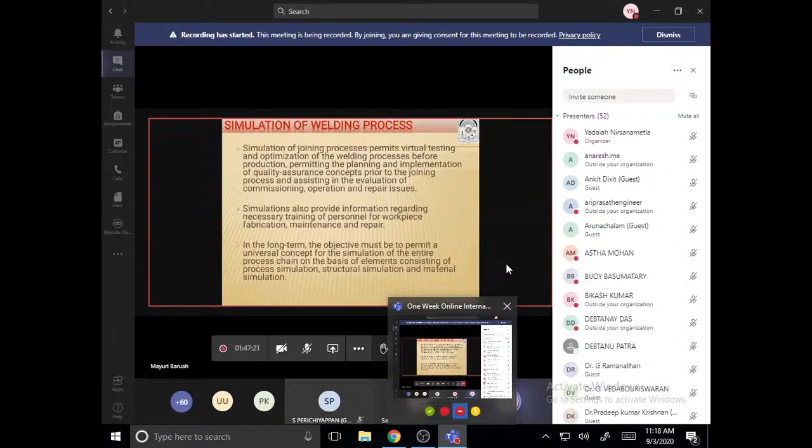Yes, that weld joint also needs to be tested. A good weld joint is only visible through your naked eye, but after that, several testings have to be done. If you need a good tensile test, good strength material, then you have to go to the tensile test. If you need a good hardness material, then you have to go to the hardness testing. So all these things are taken physically, and it consumes a lot of time as well as resources.

So nowadays, the whole procedure is made virtual. That is, through some simulation software or through some coding, it is done where not only the welding process, but all the physical phenomena already mentioned - the heat source, heating and surface, melting, and the expansion and contraction - everything is assumed there.

Depending on that, what type of zone you form, what might be the dimension, and the testing also can be done. That tensile testing can be done in a virtual mode on the same specimen, and that saves a lot of time and especially resources.

Because if you are using low cost material, it is nothing. But if you are using some super alloys or some very costly material like titanium, there's a lot of risk we cannot afford - to lose so much resource, so much material. So the virtual mode is the main important aspect.

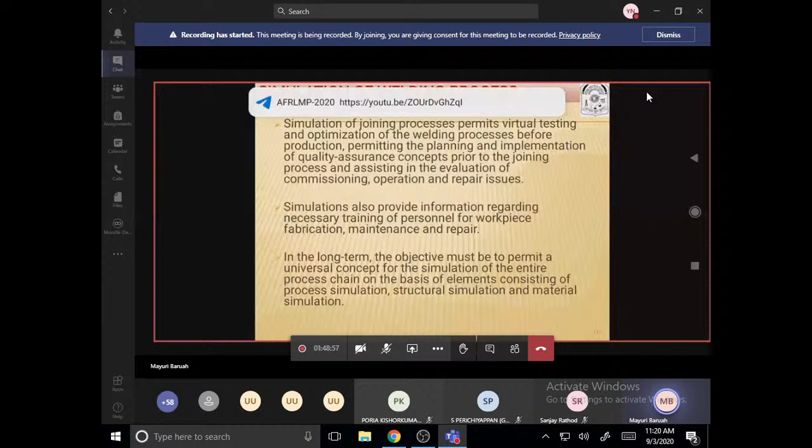So in the long term, the main objective is to permit a universal concept for simulation of the entire process chain based on elements consisting of process simulation, structural simulation, and material simulation. That is, we not only simulate the welding process, but we do the testing by giving all the thermal and mechanical properties, and you can define how fracture occurs.

Fracture is also done - fracture toughness and the theoretical J. All of these can be calculated, can be simulated through some software or through some coding, where material properties can thus be defined. So everything can be done with the project.

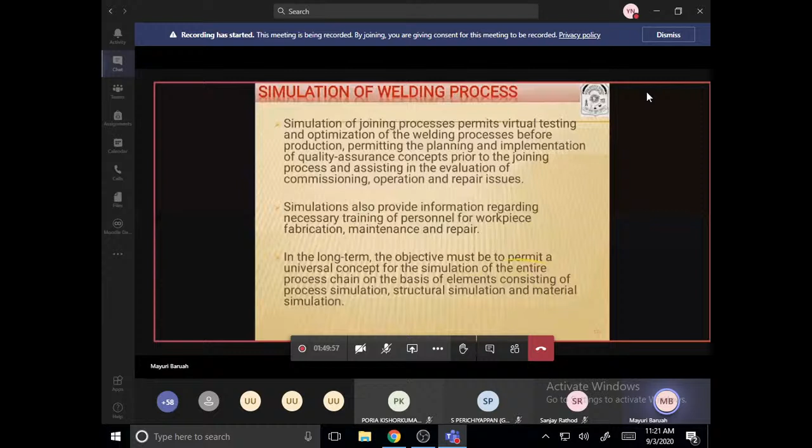So by that it tells you - supposedly some cracks are there. So after welding some circular cylindrical part, you are passing some fluid. The fluid is also exerting pressure on it, and if some cracks have already remained there, how long can you sustain it? How long can the cylindrical part sustain?

And then with pressure, you can give the values, boundary values are there - at one time, how much time it can sustain, so all this can be simulated. This is not just the component - simulation is a very important phenomenon.

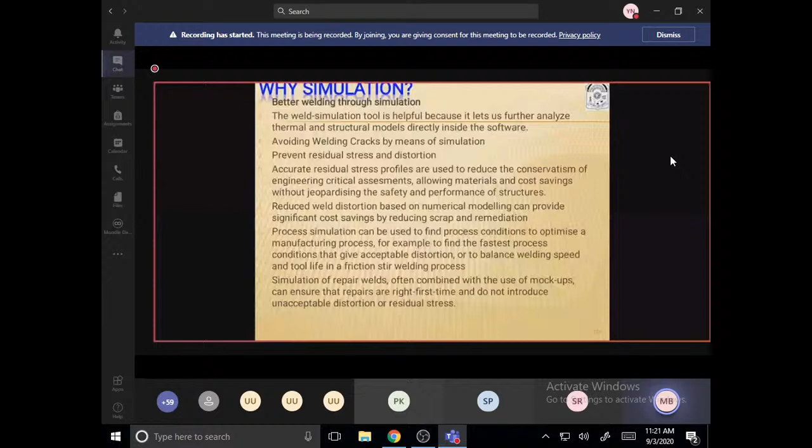Now, what are the methods that have been utilized for decades for joining, for solving the engineering problem? One is the analytical method, one is the numerical method, and one is the experimental method.

As I have already told, in the whole range you can do trial and errors. Yes, but that is very expensive, because for only a physical prototype, you first have to make 3 to 5 before making the main product.

For one single parameter you have to do the welding. It is better that if you have not got a good welding there, then you can perform the same experiment 2-3 times to ensure that this is a good weld. Only that can you apply to the main method.

But in the analytical method, what you do is use the second equation proposed for heat, for calculating the temperature - the Fourier heat law is the basic governing equation. So you try to solve it, and then you try to apply properties in numerical methods. And next is the numerical method.

That is already some mathematical representation will be there. You will be either approximating the circuit, the weld zone, or approximating the weld zone into small elements or small volumes, or finding the difference between two points in the weld line, and then solving something.

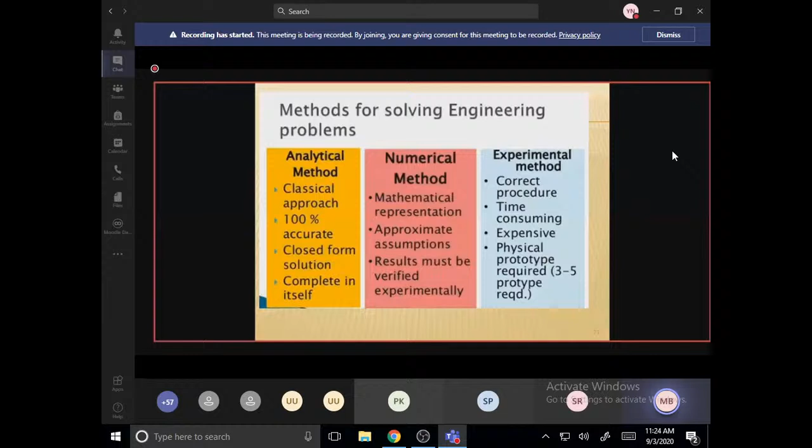So these are the various numerical methods that are available. One is the finite difference method, which is based on solving the differential equation. The difference between two points inside the weld volume is considered, and the difference in properties and physical properties between the two points will be calculated.

In the finite element method, what shape functions are there? Different functions can exist, different elements can exist, like brick elements, tetrahedral elements, hexahedral elements. So there are different elements. By this, you divide your volume into various elements. The more the number of elements, the more precise the solution can be.

If you are taking a brick element, your cube will be like a cube. So what's the difference? Then there will be 8 corners. You can find out the temperature at these 8 corners, and each element's 8 corners can have different degrees of freedom.

Understanding this is a little complex, but it is an easier approach. So all these things, the different nodes, what type of degrees of freedom and what type of functions will be there, that is the shape function. This is an important phenomenon in finite element modeling.

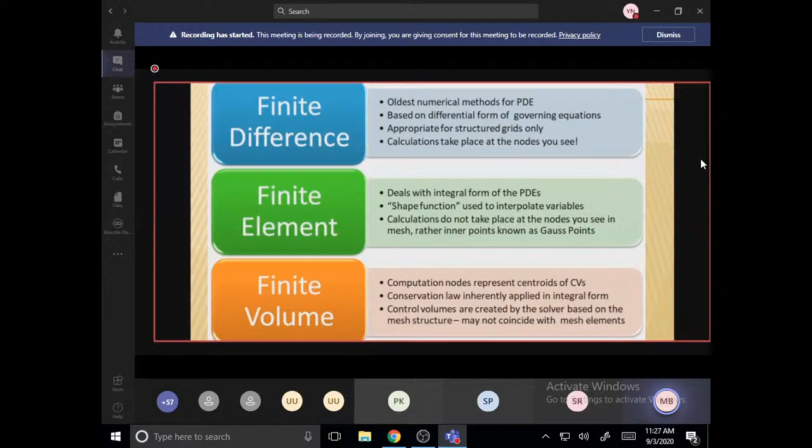Now let us come to how the finite element method works. I will be focusing on some results that I did using the finite element software, Abaqus. This is the same approach in every finite element software or coding. So what is the main basic part?

You first have to decide, the reason is the laser is focused to a small focus area. So what you need to decide is the heat source model. Now what do you understand by the heat source model? Like the laser is being focused to a small area, now what type of weld bead is formed?

After the simulation, it must be able to replicate the zone that you have found by experimental means. So the first and most important thing you need to decide is the heat source model. Then you do the thermal simulation by giving the boundary conditions, the first important thing being the initial condition. What is the initial environment?

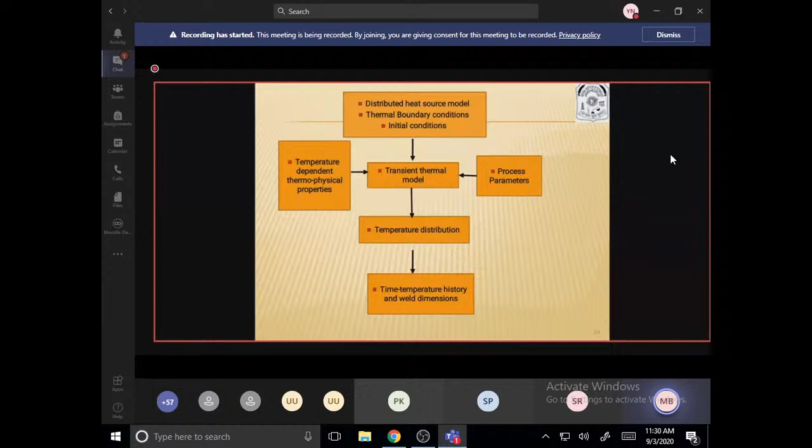Then, after simulation, you will be obtaining the time temperature profile. You will be obtaining the cooling rate, and the temperature development during the entire process.

So it is not visible here. So what are the various laser process parameters? Number one is the laser power. Number two is the energy density, the power per area.

Number three, if you are using pulse mode, what is the pulse rate? Meaning for how much time you will keep the laser on, and for how much time you will keep the laser in a very low mode so that it does not fall upon the surface.

So one will be the laser scanning speed, meaning if you are moving the laser from one end to the other, or moving the workpiece from one end to the other, so that the laser scans its entire weld area in a line. The laser scanning speed is an important phenomenon. So all these things define your laser process parameters.

You must first understand what process parameters must be used for joining. In microwelding, process parameters will have a smaller value, but you must understand the interactive effect of these process parameters. If you are using only laser power, the laser speed will also vary. At a certain laser speed, you have to vary the laser power. But if simultaneously the laser speed is also varied, then different effects will be there.

So the interactive effect of the laser power, laser velocity, and laser density is a must. Not only the individual effect, not only the laser power effect on the weld, but all these process parameters taken together must define your weld joint.

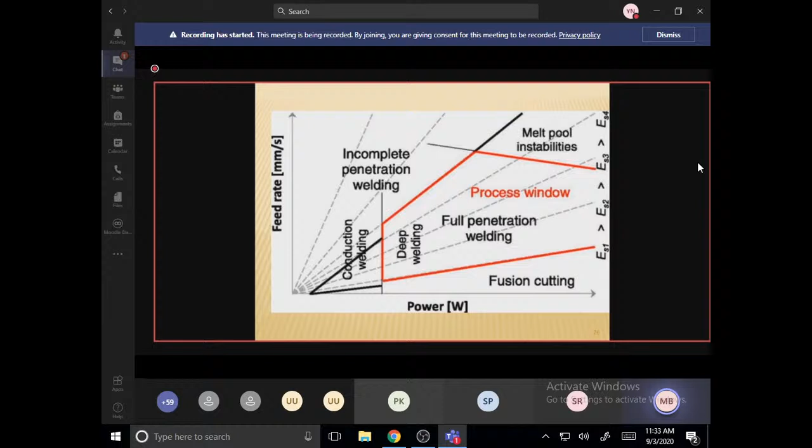And the joining is accomplished. So, what are the physical aspects now? Let us see, this is what conduction mode and keyhole mode are. I will just be defining it, not getting much into its physics.

So what is it? The laser has certain intensity. If its energy density, that is heat per unit area, is less than 10 to the power of 6 watt per centimeter square, then conduction mode can be accomplished. That is conduction mode, where the penetration is less but the weld width is large.

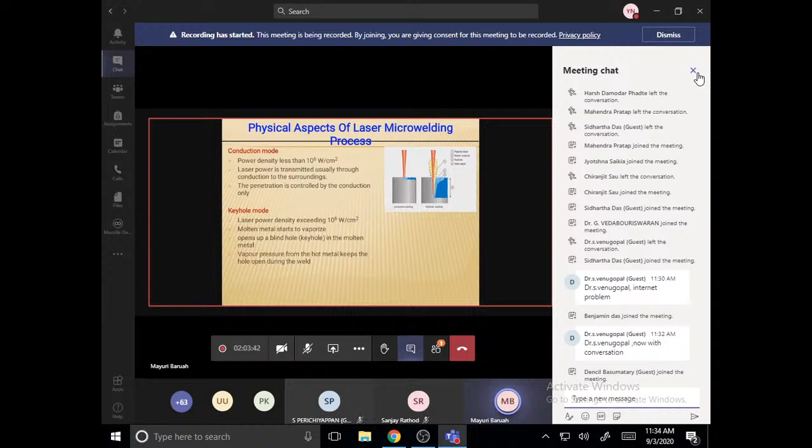Yes, that depends, because it is defined mainly by the buoyancy force and the surface tension force. A lot of fluid will be there, and how the fluid is moving during this welding process. In a molten state, how the metal is moving defines it directly.

Now next, the keyhole mode. In the keyhole mode, the laser power density will be greater than 10 to the power of 6 watt per centimeter square. Here the molten material will start evaporizing.

Because the energy density is very high, you focus on a very small area, and then the material's temperature reached will be much more than the melting temperature, and at that state it will start vaporizing. So when it starts vaporizing, the gas forms.

Then a keyhole type of thing forms, where the molten material will exert some vapor phase pressure in the downward direction and blow.

Like when you blow some liquid fluid, then what happens? Both types of things you observe. Similar is the case here. The vapor pressure will give some pressure on the molten liquid, and as such the penetration will be increased.

So this is just the basic routine.

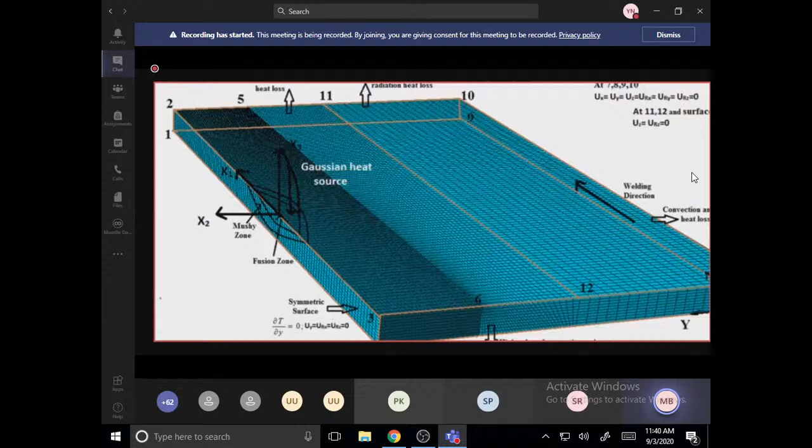But here we have shown only the surface heat flux. You must know that the laser is being focused on the surface with a Gaussian heat distribution. That is, the heat distribution from the tip of the heat source is gradually increasing towards the focusing surface.

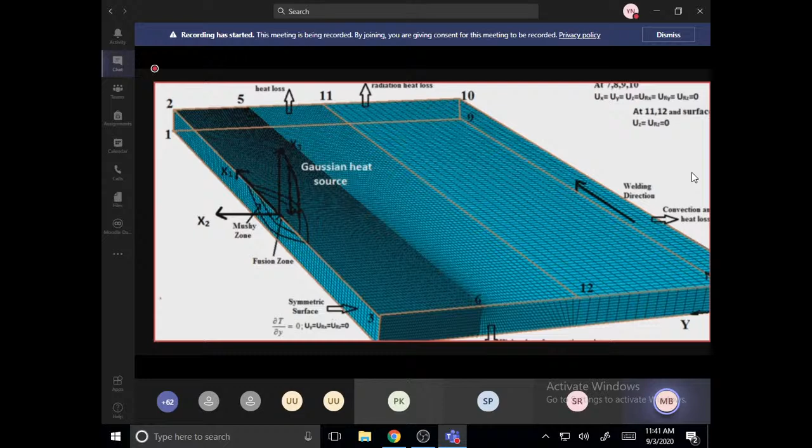And here you can find out, the mushy zone represents the value, so all these things need to be considered. If the Gaussian distribution is very steep, that is an inverted U type or inverted V type of thing, then the distribution term here will be different. If it is a little broader, that is the focusing area is more and it is not very steep, then it will gradually increase.

So this is what we call efficiency. Now the second term represents the efficiency. What do you mean by efficiency? The efficiency of a laser must be defined, and we know the efficiency of a laser heat source for welding is very low. I am not talking about the whole process, but the laser heat it has absorbed. Supposedly you have given 100 power, but it will only be able to use a small amount of this laser heat power.

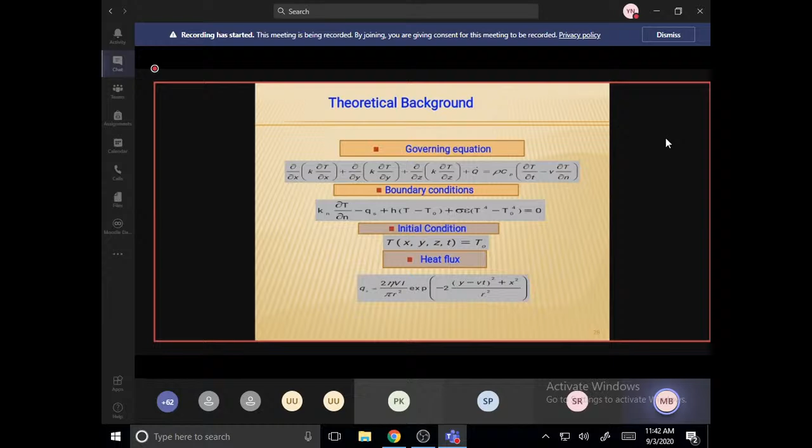Whatever you apply, the heat input received by the material for melting will be very low, generally in the range of 40%. Only 40% of the total heat supplied by the laser surface can be utilized for the actual heating and melting process. So defining the efficiency is also very important.

So here you can see the whole plate is divided into certain meshy zones, different mesh elements. The first part looks darker because the elements are very small in size, and so denser. Here the elements are smaller and more denser.

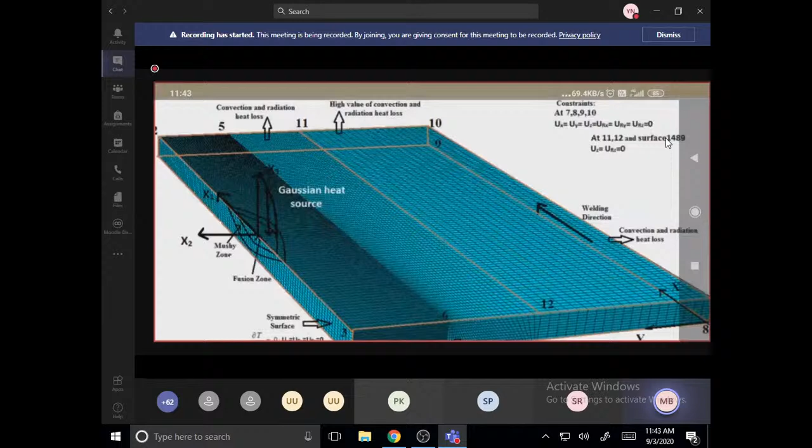This represents the area where the laser heat source is scanning, and as we move away from the laser heat source, the elements become bigger and bigger. The meshing here is done in a non-uniform way so that computational time can be reduced, because if you do heavy meshing throughout the plate, a lot of computational time will be needed.

So non-uniform meshing is followed here, and also you can see on which surface convection is taking place, which is open to the air. Open to the air means the heat is distributed to the air, and some surface will be connected to the fixture. Supposedly you are using a high thermal conductivity fixture like copper, then you have to define a different convection coefficient.

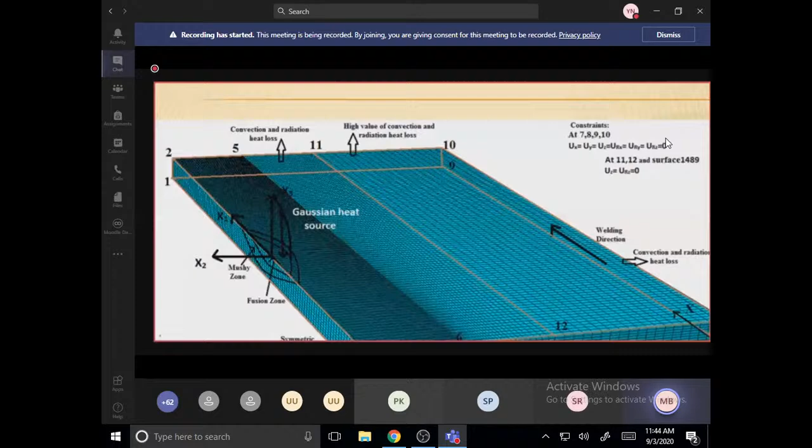If you are using only a mild steel fixture to hold the plate, then you have to use a different heat convection coefficient. In a similar way, radiation is also taking place, and from the top surface to the lower, the heat is conducted is a plus, and the heat loss by convection and radiation you have to subtract from the heat conduction.

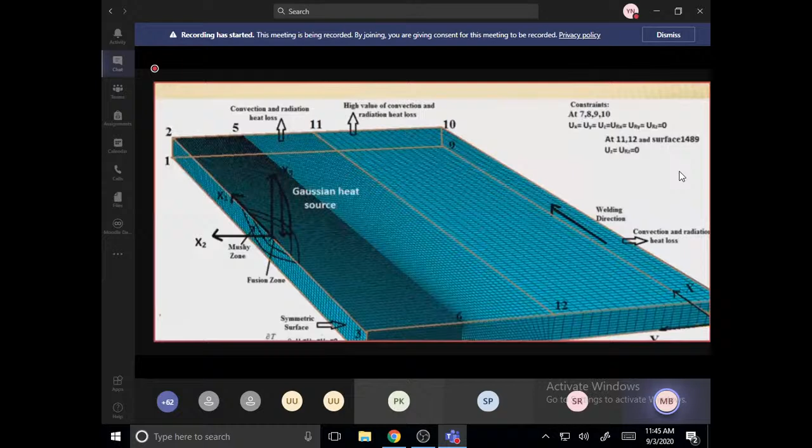So all these things, summed up together, define the weld zone, which needs to be defined very carefully while considering the weld zone. This is one of the situations which is shown here.

Here what we are doing is showing heat sources for three different materials, and how the material properties vary from one end to the other. Sorry, here it will not be ampere, it will be power, that was a mistake by me.

So what happens for titanium, which has very low thermal conductivity, is that it will focus the heat received to a smaller area. But with stainless steel, the top surface is stainless steel and the middle surface is mild steel. For mild steel, the thermal conductivity is large, much larger than titanium.

So what will it be doing? It will be conducting away the heat. So the area affected by the laser heat source will be larger, as is also revealed by the second diagram.

So this is how the simulation part occurs. Here the red zone defines the melting zone, that is more than the melting temperature. So if the melting temperature of steel is 1500 degrees Celsius, in the red zone it will be plus 1500 degrees Celsius. So here you must note down all the temperatures: the liquidus temperature, the solidus temperature, the microstructural difference temperature, recrystallization - all these zones in different colors represent different temperature distributions.

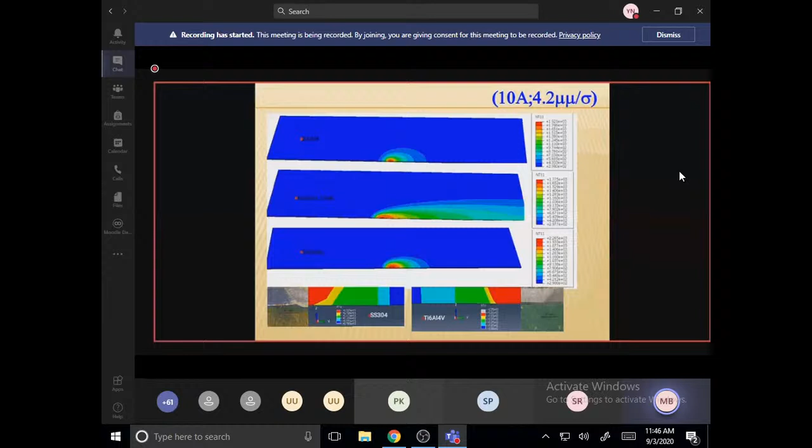So now from here, how will we find out? This is how this rate will be determined. In the third diagram, the graph shows that as you move, 0 represents the initial state, then as you move and the welding is completed, the time temperature for the welding is completed in 30 seconds.

And at the end you see that the peak temperature is the highest, because the heat from the torch is abruptly ended there. So you see that at this point the peak temperature abruptly rises. Otherwise, during the welding you can see the peak temperature is almost constant at 5, 10, 15, and 20 seconds.

Why? Because the welding process, though it is a transient process, has achieved equilibrium. At the start point and at the end point, the temperature is almost constant.

The heating rate and cooling rate are also almost constant for similar plate material. So this is how you can compute it.

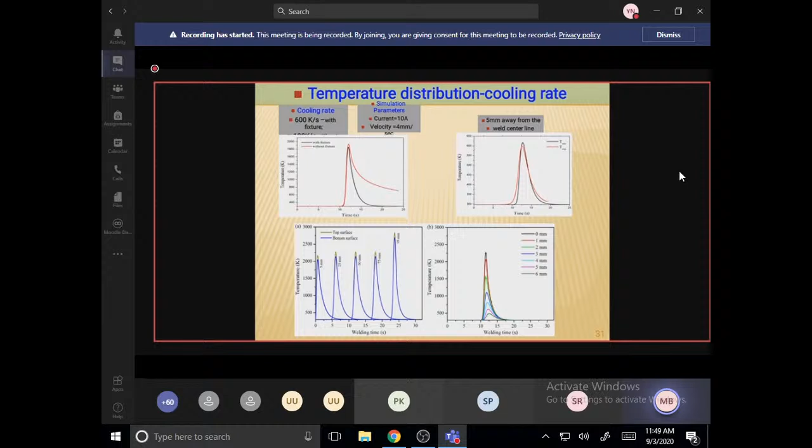Here I'm showing you have used pulse laser and how this radiation will be there. The blue color here represents what? They represent that this is not continuous welding - you are approximating it, though you are applying laser pulse, as a constant continuous curve.

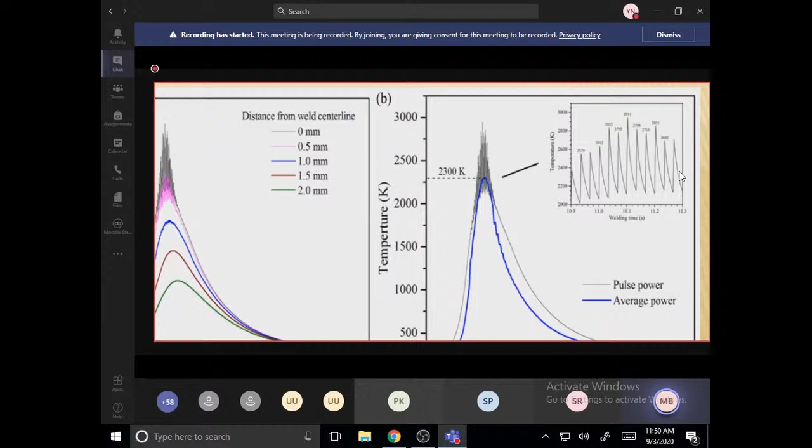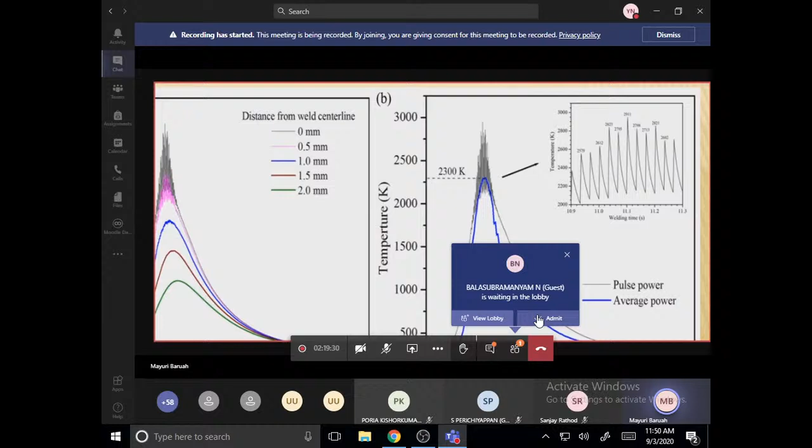Yeah. Your voice is clear, your voice is very clear. Yeah, you can speak. Okay.

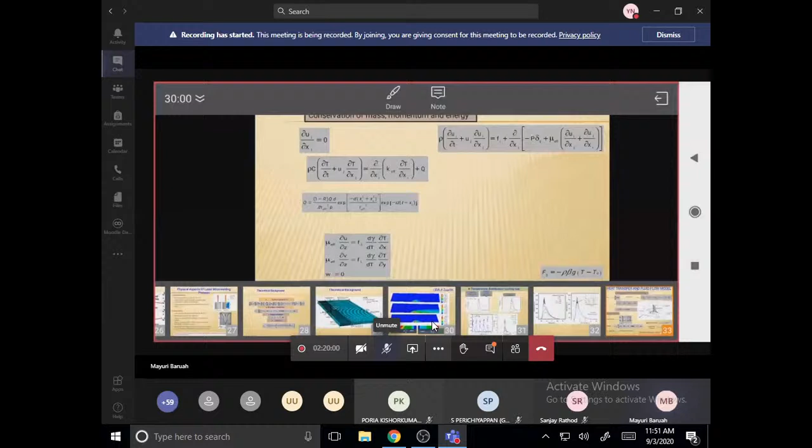So now next will be the heat transfer and fluid flow model. The earlier model was neglecting the fluid flow term, that is the various forces acting on it. As I already told, buoyancy force, surface tension force, viscous force - all these forces are neglected in the earlier conduction model.

Here this is a convection model, meaning you are taking into account the fluid flow. What will be its difference? In the earlier model, the governing equation is only the Fourier heat law. But here, what is the governing equation? It is the mass conservation equation, that is the mass flow rate is constant.

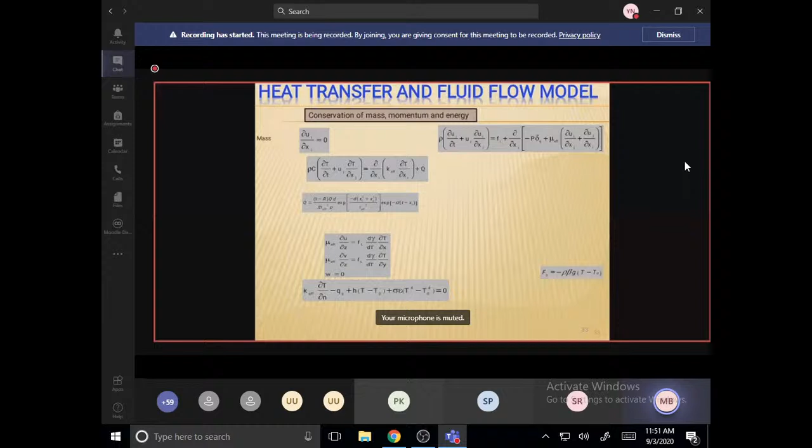So the second is the momentum equation, and third is the energy equation, that is the Fourier equation. So here, these are the various three equations that you must integrate and solve together. In the momentum equation, you take into account the various pressures and forces acting on it. And the energy equation takes into account again the temperature variation in the x, y, z directions and with time. So all these things you have to solve.

But here, three types of assumptions are done: that it is a Newtonian fluid, and it is a laminar fluid. So what do you mean by Newtonian fluid? That is the shear stress and shear strain that is happening, because one surface will be solid and one surface will be liquid.

So what about the boundary - when you are welding, only a small portion will be melted. The boundary of the base material will be in a solid state. So that is the boundary, and that boundary will be exerting some pressure. So all these things.

Stress and strain will be taking place, shear stress, because the liquid will not only be deforming longitudinally but some shear deformations can also occur. Shear will change its shape. So that shear stress by shear strain of the liquid will be linear - the more the stress, the higher will be the shear strain developed. This phenomenon is a bit difficult to understand, but it needs extensive solving.

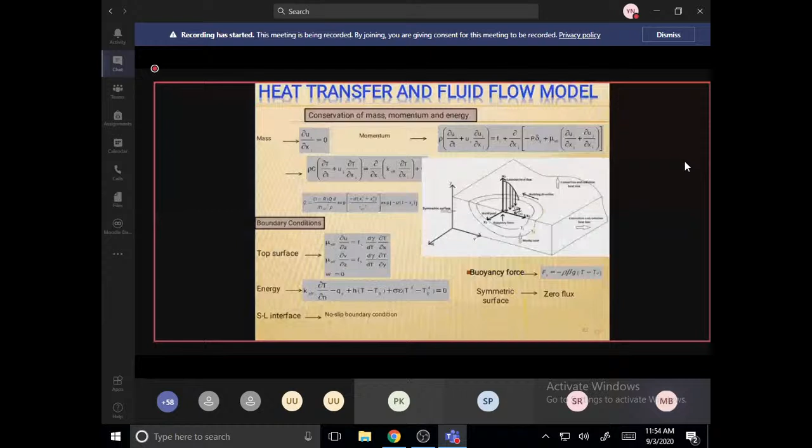What you must know while doing the weld pool analysis is the dimension coordinate, the nodal coordinate. Since we have divided the whole plate into small elements in finite element method, suppose a cube, that cube will have 8 corners, so each corner is called a node. You must know the coordinates of that node, that is, if the first node is 0,0,0, where the second node will be, and the shape function, there will be a certain way to solve it. So you must know the shape function value, that is the dependence of one node, interpolation of one node with respect to the other.

The process parameters are very important. Then what are the uncertain parameters? What do you mean by that? Certain parameters like efficiency, you cannot take arbitrarily, it depends on the beam size.

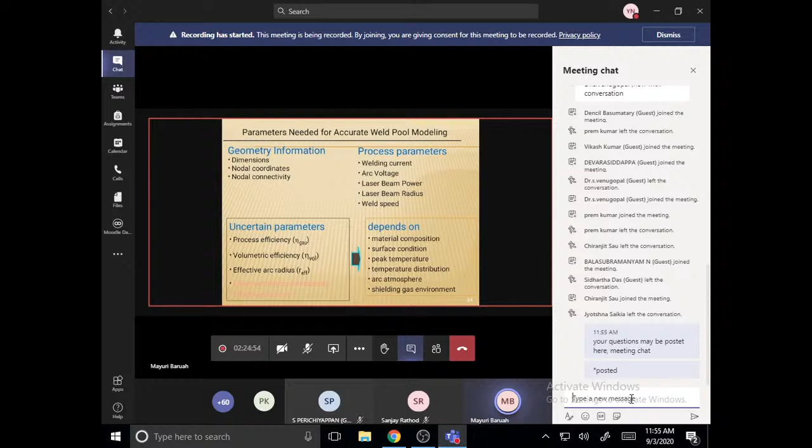And volumetric efficiency, that is the efficiency I was saying that laser efficiency is very low. But the effective thermal conductivity, now you know thermal conductivity of titanium is something, thermal conductivity of stainless steel is something, thermal conductivity of mild steel is much higher. But do you know in the molten state what will be the thermal conductivity? Because in the molten state it will be immediately molten, the temperature will be very high and then gradually decreasing, so you cannot define the thermal conductivity very accurately. You must give the temperature dependent thermal conductivity, but what is exactly the thermal conductivity is an uncertain parameter.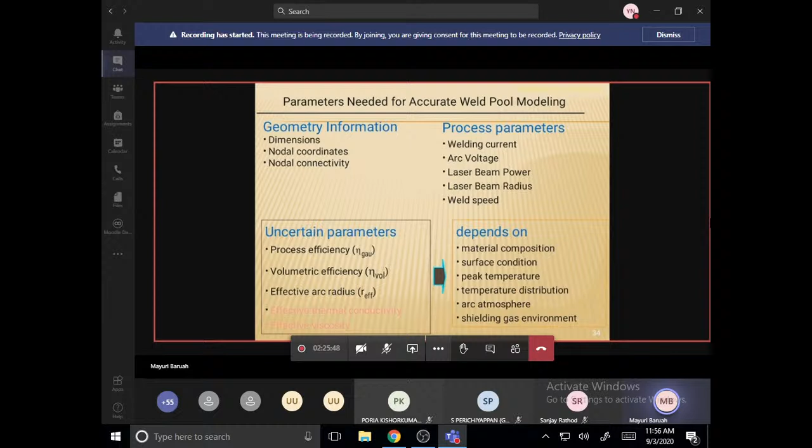So you need to do the optimization of the weld so as to find out the most effective thermal conductivity, the effective value of the viscosity, because for a liquid it is okay, but with temperature the viscosity also varies. So there is transient temperature in the weld zone, and the effective measurement of all these thermal properties is also important. For this you integrate your fluid flow model with some optimization tools. There are various optimization tools available, so all these things you need to consider.

For stainless steel it will cool down, for steel it will cool down suddenly. If the cooling rate is very high, martensitic structure will form; if the cooling rate is low, austenitic structure will form. Similarly for titanium, it was alpha, suppose you are using titanium-5, it was in the alpha-beta range, but as it is melted it completely transforms into the beta range, and as it cools, depending on the cooling rate, it will form alpha martensitic structure or alpha lamellar.

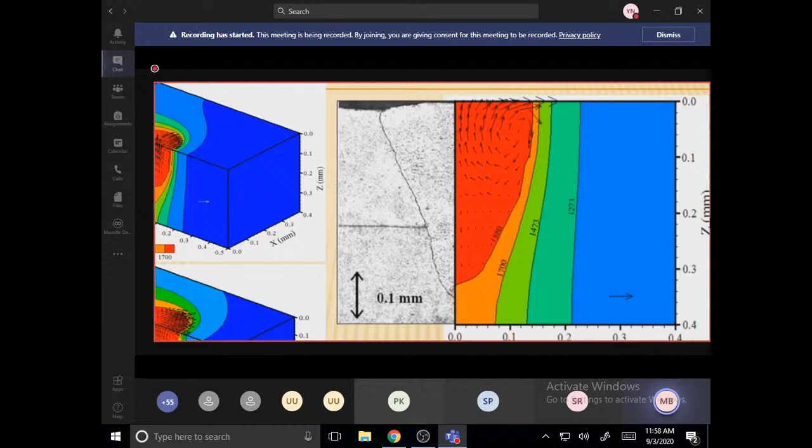So all these things depend on the various temperature field, and it also depends on the velocity. The arrow line here shows the velocity region, so it is moving away, it is moving in a clockwise direction, moving away from the center of the weld towards the outer surface. Equilibrium moving outwards means this welding is of the conduction type, not keyhole type, because the buoyancy force is acting upward and it is moving outward, and also the surface tension force exerted is different. So you must know not only the temperature field but the velocity, the movement of the liquid, the movement of the molten metal, is also important to take into account.

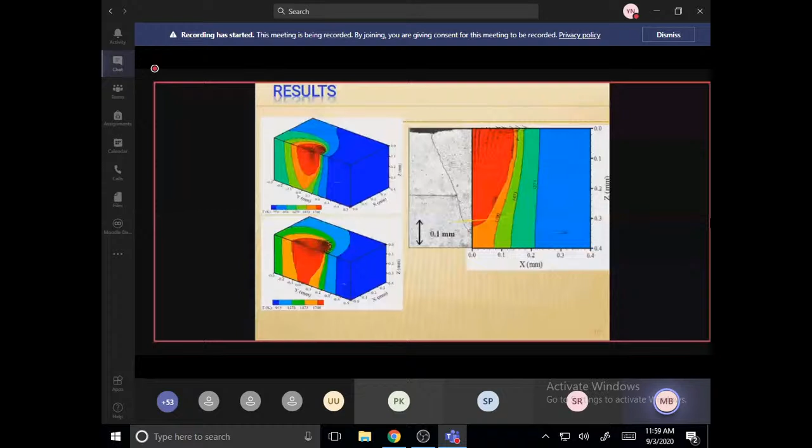This is an important thing, the effect of various parameters, how you define the various parameters. One is the Peclet number. What is the Peclet number? It is nothing but the ratio of heat convection to heat conduction, meaning how much the conduction mode compares with the convection mode. Depending on the value of the Peclet number, you can assume whether convection must be taken into account or conduction is sufficient to define the weld characteristics.

This is important: if the Peclet number is greater than 1, then convection is a must, convection is very important. The fluid flow analysis must be taken into account, and buoyancy must be taken into account.

Now, the one important thing I forgot to tell is that it is an incompressible flow, meaning the density is not varied, though temperature is varying. Then how is buoyancy included? The buoyancy is included in the fluid flow through the Boussinesq approximation. At the instantaneous point, the temperature might vary, and though the density is same, at the approximate instantaneous point the density may vary, and by that the buoyancy force is taken into account.

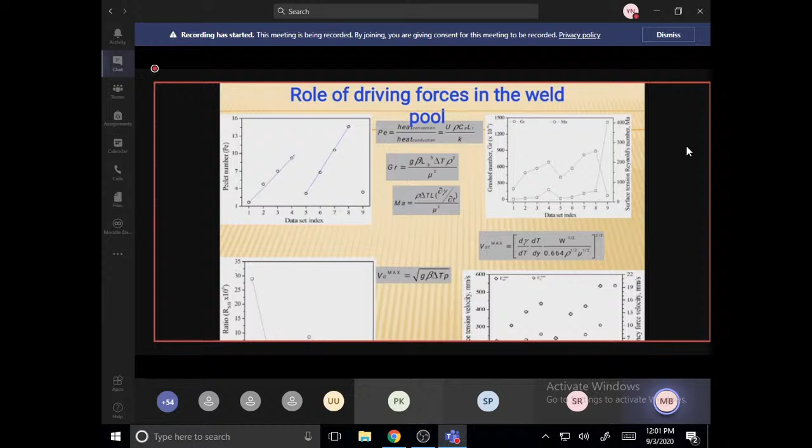Now, what is the Grashof number? It represents the ratio of the buoyancy force to the viscous force. So it's important to consider whether the buoyancy force or the viscous force is important. All these terms must be calculated with respect to the process parameters.

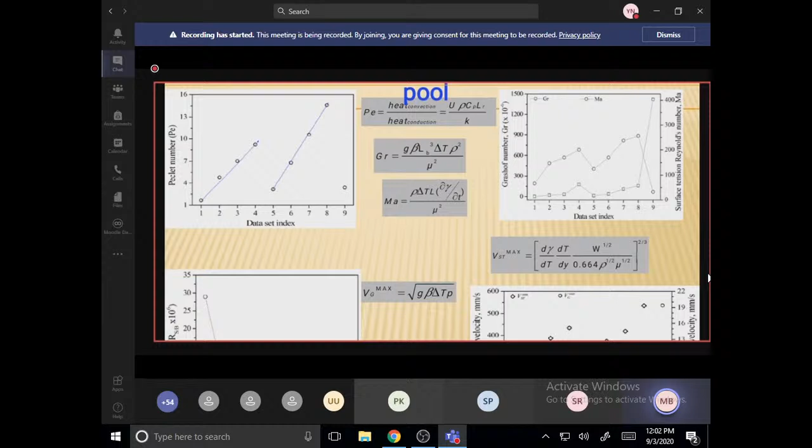So how are the process parameters defined here? In the Grashof number, G represents the gravitational acceleration, meaning what type of velocity field will be there, and by gravity how much acceleration will be generated. Then beta represents the thermal expansion coefficient, along with the temperature difference and the density. And L is the length of the weld through which this buoyancy force is operating. These are the various terms that need to be defined.

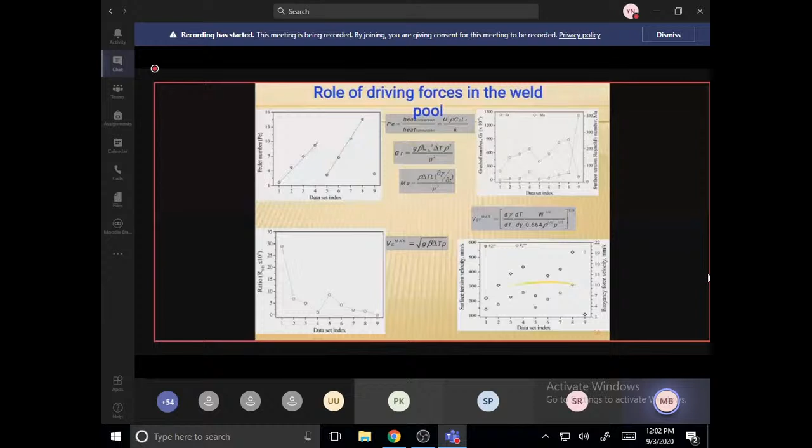Now let us understand, since I was telling that by plastic joining you are joining your plate, what is the important parameter that you must know? That's the last thing I will be telling you. Just five minutes more.

So it was the same for your heat conduction equation, but here, heat flux is assumed at the transparent top surface used for joining the polymeric material. The heat flux is assumed to be zero there. Then for all the heat flux equations you use, you assume it to be focused at the top surface of the lower material, and whatever heat is conducted accordingly.

Now here two parameters are important: the gap length, if there is any gap, and also the roughness factor. Because no matter how much you clamp the two pieces together, there will always be a certain gap between the mating surfaces. So this is how we take it into consideration.

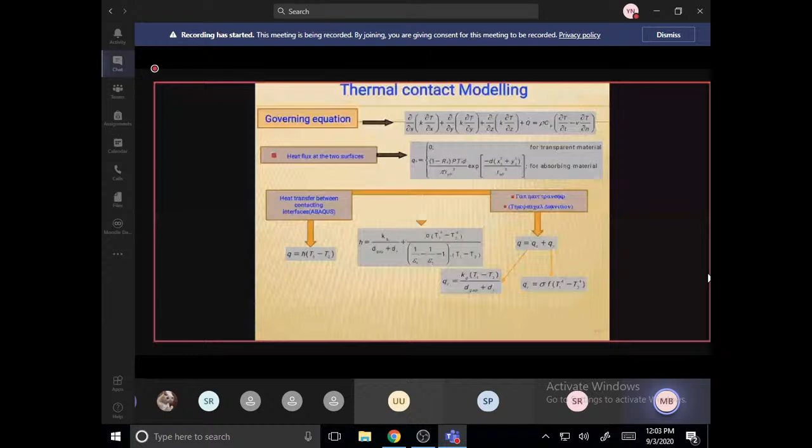Here, when you take the roughness into account, what is most important is the temperature of the pieces. The thing is it becomes more clear as you see the joining taking place at the interface. Now, what is the temperature at the interface?

And then gradually the temperature of the upper surface increases and that of the lower surface decreases, because it starts conducting the heat away towards the upper surface. So in this way, the air temperature in the middle gap is calculated, and then it is incorporated into the model equation.

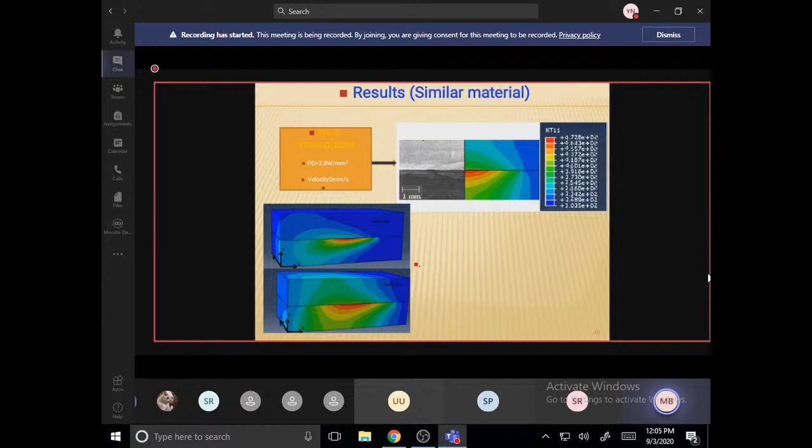Was convection occurring there, or how much radiation was occurring there? Some coding can incorporate this by taking into account the temperature developed at the two surfaces. So here it is seen that melting is occurring only at the lower surface and heat is conducting away. This is how it works, and this is a similar joint.

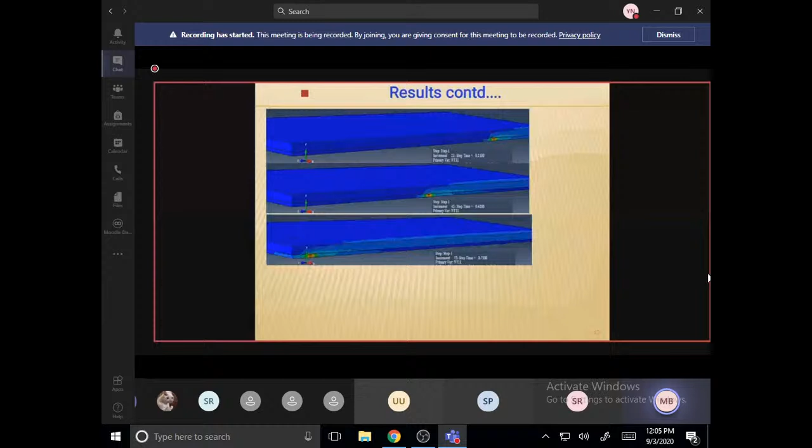So these are the considerations already covered, I think.

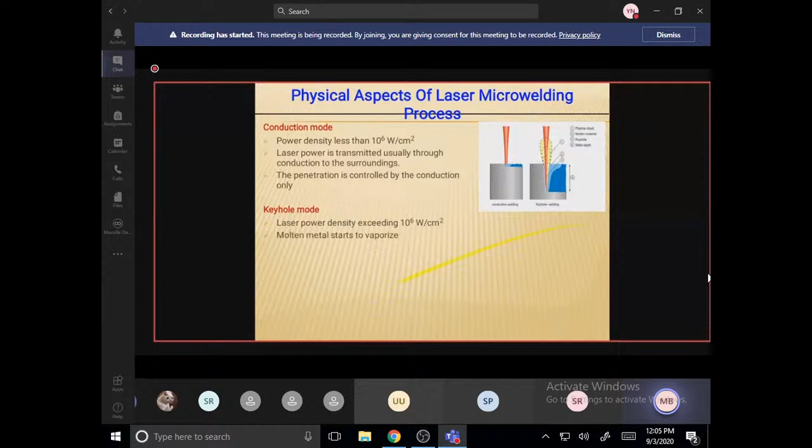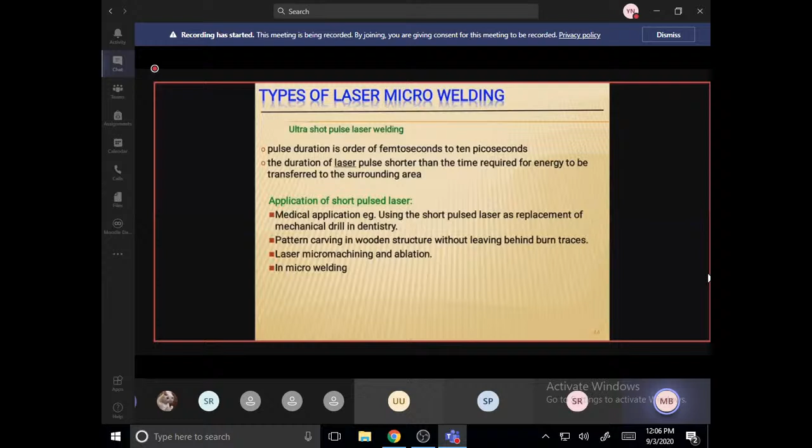An important application of laser microwelding is that it can be done at a very fast rate. The laser can scan the surface of the base material in milliseconds, or even in nanoseconds, down to femtoseconds to picoseconds—that is 10 to the power of minus 15 to 10 to the power of minus 12. You must realize how much faster the laser can be.

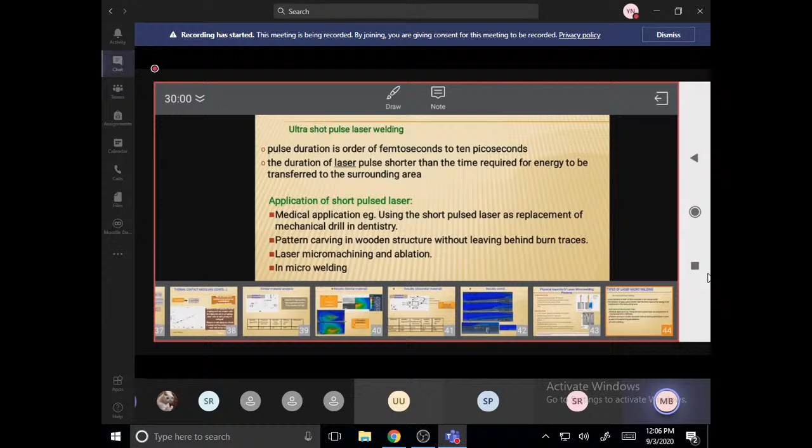The laser can scan the surface very fast—this is one application of laser. So the heat input falling on a certain surface will be very low, though the intensity is high. This is how you can utilize laser for microwelding.

One important advantage is seamless, high speed, accurate, and discrete one pulse welding. This means a single pass of the laser—you don't go throughout the surface from one end to the other repeatedly. In fast laser welding, the beam will be on for some time then switched off for some time, but here there is just a single pass hitting out the whole surface.

So this method is utilized for joining very thin components like watch parts and various metals and alloys.

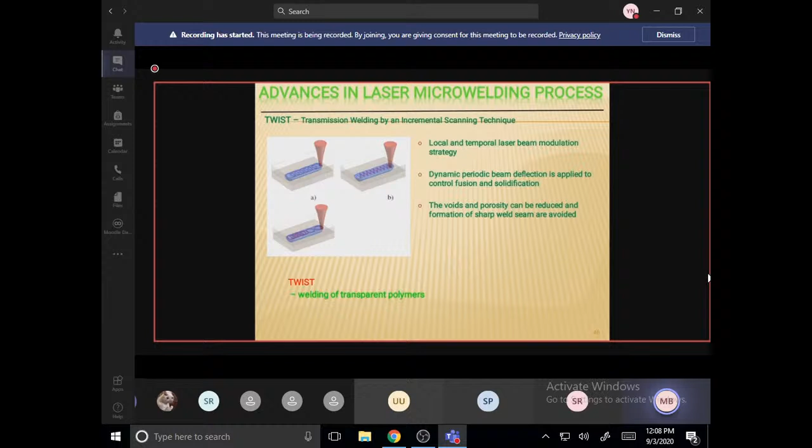One advance in laser microwelding is the TWIST—this is nothing but the same scanning laser transmission welding, where the laser is given not in a straight line but in a coil form or different scanning patterns. The laser transmission welding I discussed earlier scans for a single straight line, but here it is scanned spirally, like a coil. We need to understand how this is utilized.

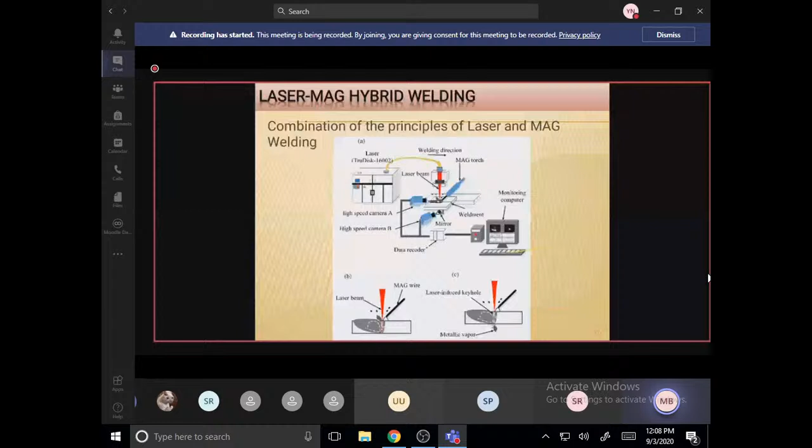So these are the various methods. Now laser is being hybridized with some other technology and utilized—one laser can be hybridized and then applied.

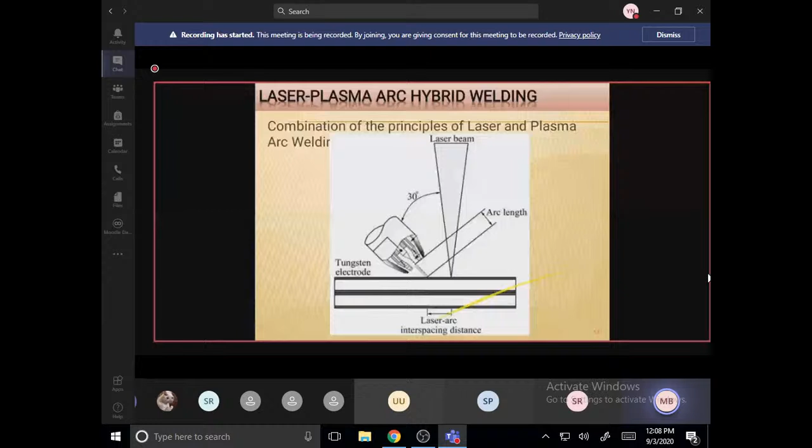The most important application of laser hybrid in microwelding is the use of Nd:YAG laser with fiber laser. The fiber laser has very high energy density and can be focused to a very small spot, which eliminates the use of any additive. As I mentioned, laser transmission welding needs additives to be utilized. Earlier, Nd:YAG lasers were mainly used for laser transmission welding, but now fiber laser is increasingly applied due to its high energy density, which eliminates the use of additives.

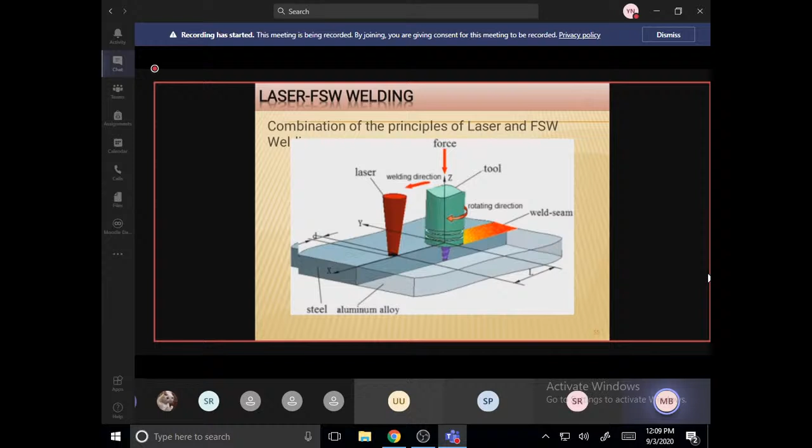So the combination of Nd:YAG laser and fiber laser is being tried as a hybrid process, and new capabilities are being brought now.

The current development is that laser has been utilized, due to its ability to be focused to a very small area, to weld very high conductive materials. Copper has very high conductivity, so joining it by welding is very difficult, yet it has still been properly utilized by laser, and it has also been utilized for joining polymers and other materials.

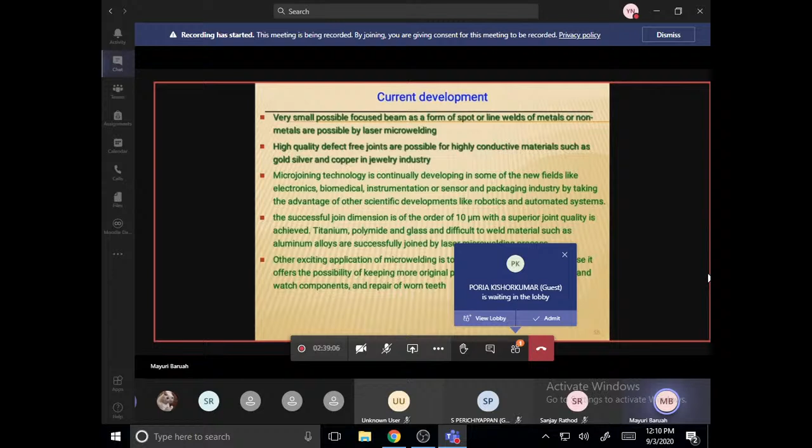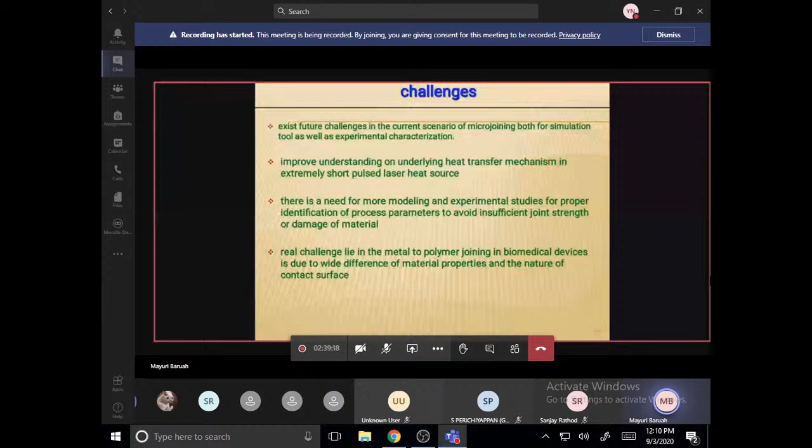So what are the future challenges? We must first understand the different heat sources and what the polymeric materials are. For the present scenario, I have kept my slide simple. Now, numerical simulation studies might help you understand the different advantages of microwelding and how simulation can be utilized. Thank you.

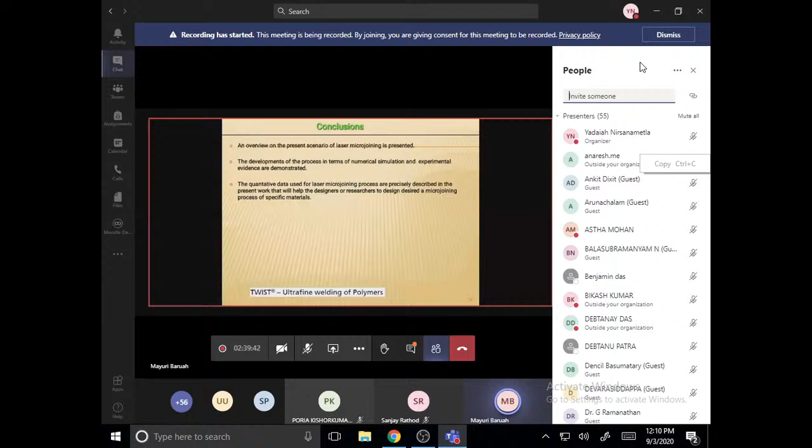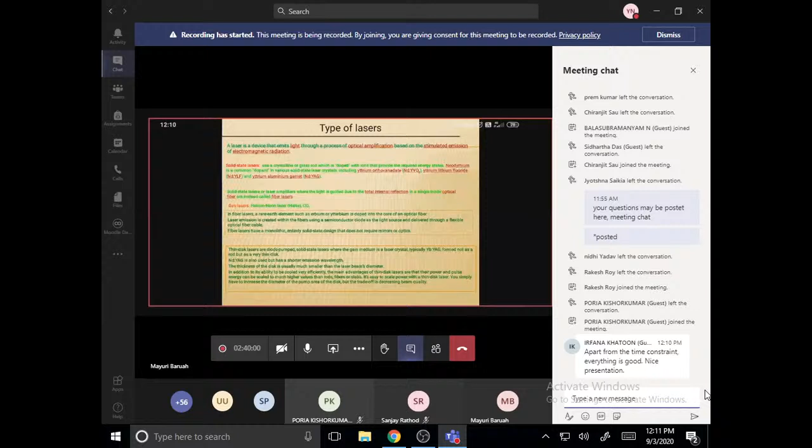One question from Irfana Khatoon. Irfana, apart from the time constraint, everything is good—nice presentation. I thought the time constraint question meant she was asking about this simulation related question, but she's saying something about the time. Okay, sometimes it happens for Irfana. We'll wait for one more minute or thirty seconds for this.

In vacuum, whenever you are doing this, the temperature of the vacuum environment matters. As I already told you, you need to define the initial working environment.

If you are welding underwater, the buoyancy forces will be different. In a vacuum environment you are not keeping any air, so the initial temperature will be different. Even at the same temperature, no reaction can take place in vacuum, so convection and radiation will be different, and the heat losses will be different compared to a non-vacuum environment.

So it is basically defined through the boundary conditions. Am I clear? Yes, thank you, madam.

Any other questions from participants? One question from Bikash Kumar: what will be the major criteria for polymer and metal welding?

What will be the major criteria for polymer and metal welding? What is the basic difference between the two? The question is not clear - he may be asking about both similar and dissimilar joining.